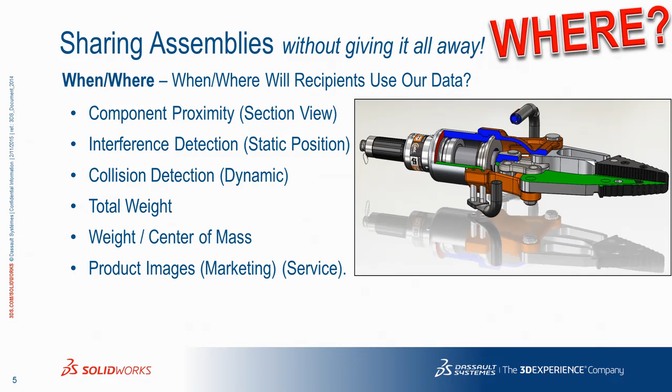Sharing assemblies again without giving away. Why wouldn't you want to share? Why not? Well, it's pretty obvious. We kind of covered this already, but it's a repeat because it's a big issue. Have you ever thought of sharing your product but chose not to because of fear of sharing too much? And this happens every day in every industry. So the why is really the big hurdle.

But why wouldn't you share? If we look at the positives, the benefits of sharing your data, assuming it is something that somebody else would use in their designs, there's market awareness - to be recognized by your potential customers, it'd be nice if you shared your stuff so they could see it and find it and be made aware of it.

Engineers can then test fit, form, and function with your component or subsystem. Minimize repeated effort - that's a big one for me. I hate doing things that have already been done before. You know somebody's already engineered and drawn up this little pedestal podium thing. Why do I want to redraw it just because I'm trying to do some layout work? No, I want to find something.

Speed confirms selection. Everybody here has got project deadlines. You want to get them done faster, so if you can get somebody's models, that would certainly help. We're trying to complete the design, and without it, you're left with incomplete engineering data. How heavy is it? Where's the center of mass? The basic things. And this is going to build relationships between you and your customers, which should obviously then drive sales.

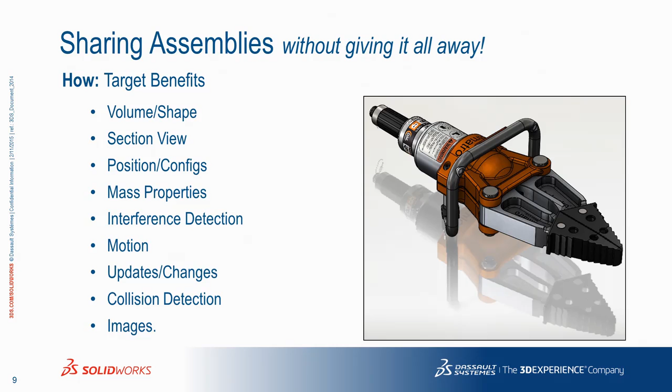So the big question is how. These 6 methods are the ones we're going to talk about: pack and go with eDrawings, neutral file format, saving assembly as a part, insert new part and join, SpeedPak, and Defeature. So let's get into it.

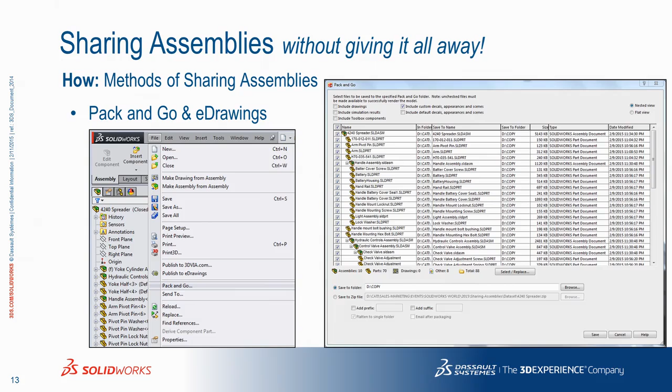Pack and go with eDrawings. Pretty much everybody's probably aware of this, that either through the icon or through the file menu, you can save your assembly with pack and go, and you get this really great big long list. You can save it to a folder, you can save it to a zip file. When you go to share that, there are some benefits.

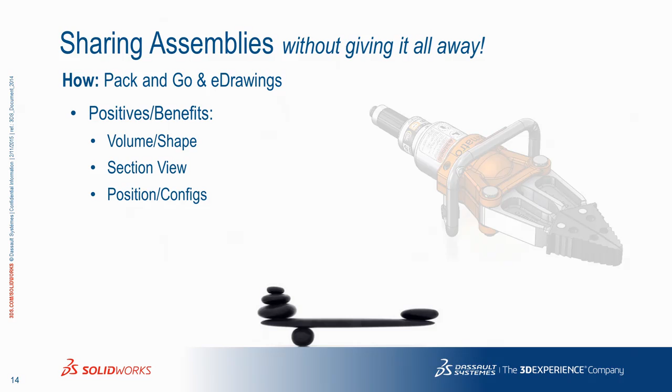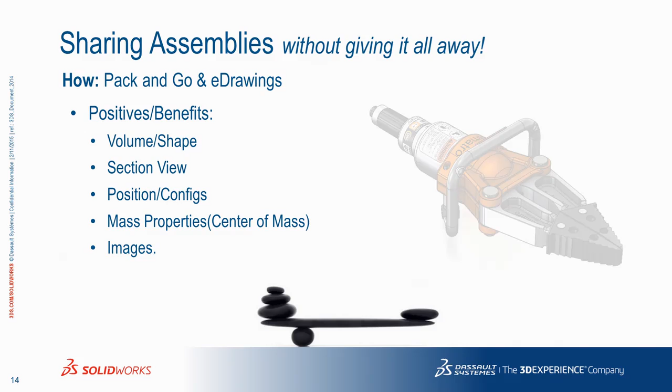You do have the volume and shape. You have the section view capability, position and configurations to a degree when you're dealing with eDrawings. Since this is pack and go, this is SOLIDWORKS native files - if somebody gets a hold of SOLIDWORKS, they can do a little bit more with that. Mass properties, center mass, that actually carries through to eDrawings - the center mass does, mass properties not so much from what I found, at least in eDrawings. Images - since you have the full data, you can make some pretty decent pictures out of it. On the negative side, mass properties didn't come across completely.

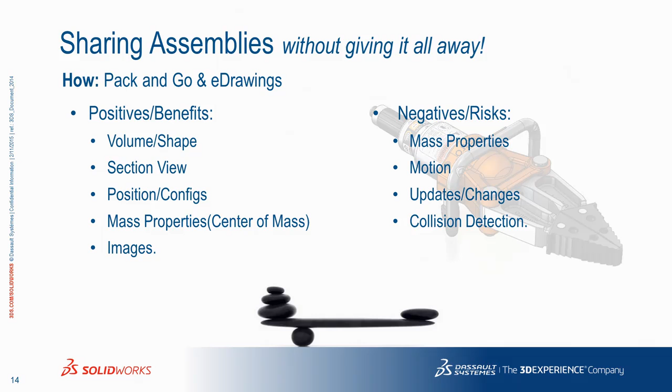Motion, not so much. If you've got an exploded view, you can animate that, but that's about it. Updates and changes: you've got the native data, so you can replace individual files fairly well, but you have to manage and replace those. I can't really decide which side to put that in, but collision detection with eDrawings, we're not going to be able to really do that.

But the big issue is that you're giving it away, which is why we almost shouldn't have this one in the slide. But everybody knows how to do pack and go because they're moving stuff back and forth amongst coworkers, mobile computers, and so on. So we're using pack and go a lot. You might spin your design into one variation or adaptation for one customer's location versus another. So a lot of times people will use pack and go, but this is kind of a big no-no if you're trying to share your information without giving it away.

So the real stuff comes next: neutral file formats. Probably everybody's worked with some of these file types, whether it be Parasolid, Step, or IGES. Those have been around since the beginning, I guess, along with ACIS SAT files. There are some options both on export and import of these files that you can play with, and there are some vintages of IGES and Step to be considered.

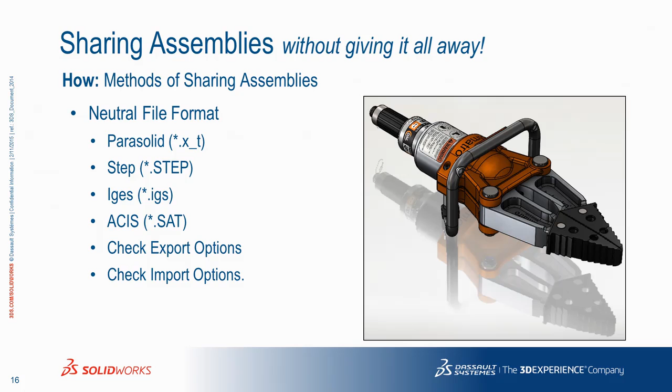So when you do a Save As, you can change the file type here. In the Save As dialog window, if you set the type, the Options button will come up where you can then deal with either export or import options. When importing, if you set the file type to all and select the file, I know it never used to give you that option - I think that might have changed though. But if you don't see the Options button, definitely set it to the Save As type. Then you'll get a list of options where you might consider changing some things depending on how well that might translate.

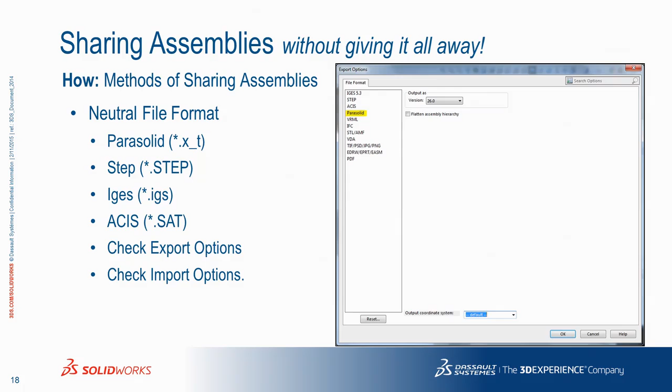Here are the results of using the export method with Parasolid. We have the original geometry on the right, and the resulting import back into SOLIDWORKS on the left. If we're concerned about the imagery - how good does it look, since we want to make marketing literature for our product from what we've downloaded off the web - that's not bad, but you see there are no decals, and some face colors seem a little off.

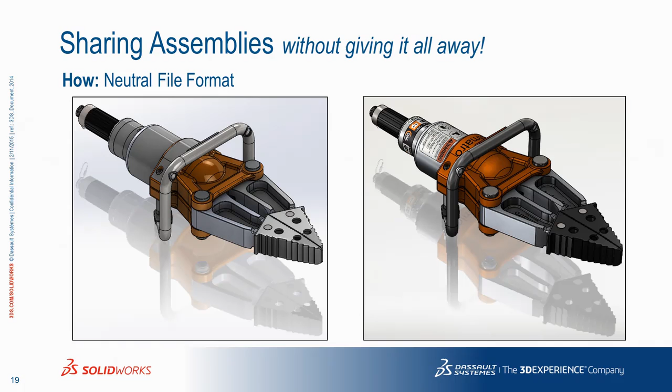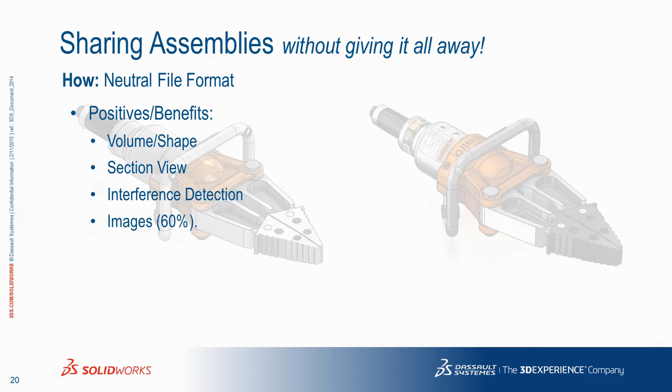So let's take a look at the trade-offs. On the positive side, we have volume and shape done very well. We can section view this real easy. Interference detection in a static state is going to work. Imagery, again, about 60% - I just threw a number at it, sounded good, better than 50%, because then I wouldn't know where to put it.

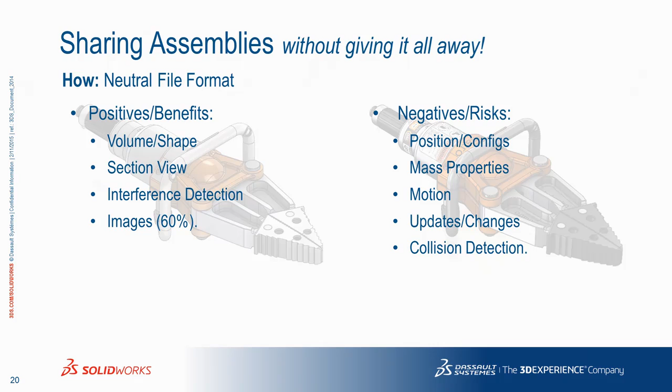On the negative side though, positions and configurations - you're only going to get one, otherwise you have to do a whole other model set type export. Mass properties did not come across. This all comes in as individual parts or bodies, and they don't have any material information coming across. There's no motion, no mates, and updates and changes involve a lot of different files or bodies to deal with when a change comes - sounds like a bit of messing around. No collision detection either, which kind of flips the pile of stones around, making this maybe more negative items than positive.

Another method: save an assembly as a part. How many people have tried this? Oh wow, everybody - that's awesome. Maybe for the one or two people who didn't raise their hand because they're tired of raising their hand for these kinds of things, I'll show the video anyway.

If I can select that - there we go. So from the File menu, we do a Save As. There are a few options when you change the file type from assembly to part. We can see that there's exterior faces, exterior components, and all components.

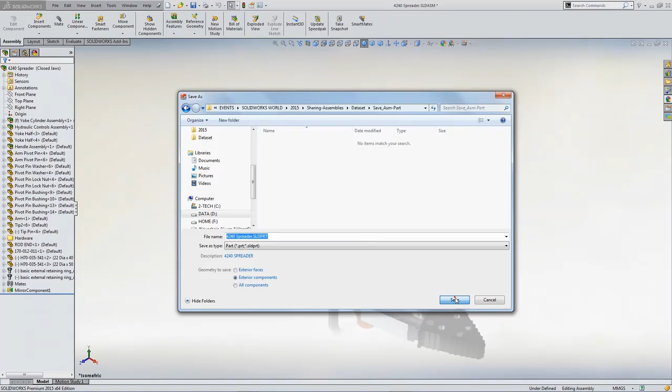If you've experimented with this, which it seems like most of you have—my first go around with this video—here is going to show exterior components being saved to see what that looks like. What you find out very quickly is what you consider to be exterior components and what SOLIDWORKS sees as external components are not the same.

So you usually end up with something a little less desirable in that regard. So I went back—let's see, where were we at in the video here? I closed it. Here I'm going to open up the part file now, that is that assembly, to take a look at it. Imagery initially comes in kind of messed up. Oh, and I shouldn't have hit that. Dang it, now I killed my video.

All right, since most of you saw it, I'll just explain the rest of it. Imagery came in a little messed up at first, but a control Q, good kick in the pants, straightened it out. But there was way too many items in there that I didn't want to share because of external components.

It's more like if you took your product and submerged it in water, what would it touch? What would the water touch? Every one of those parts that gets wet is what gets selected for exterior. So if you've got a small pin in a large hole, when the water can get around it, it's going to grab everything inside, which kind of stinks.

So the other method that I used in the video was to take the assembly, create a configuration where I'm selecting components to be suppressed that I don't want to be exported. So I'm manually getting involved, spending some time with it, but I'm building a configuration so that I can export all parts that are not suppressed into the part file to make a better solution.

The results here, graphically, looked a lot cleaner. I'm pretty happy with the imagery there. If we look at the trade-offs here, benefits-wise, we got the volume and shape again, section view capability, even though it's a multi-body part. Interference detection, again, static state stuff. Image stuff looked like it was closer to 90%, just maybe the decal stuff.

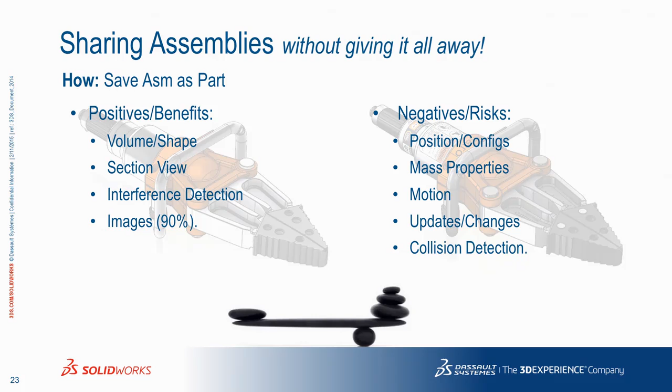Updates and changes, you got to go back through this. If you make the configuration like I did, which worked better, at least I don't have to do so much effort—it's just a save as, but there's some other options with maybe some better tools. So collision detection, again, not so much. So a little bit more on the negative side maybe than positive.

Insert new part join. How many people have tried this? Excellent, so something new for you. So it was worth coming here maybe. That was the point, right?

So insert new part. Oh, let's back up. Let's show the video because I think I like this mouse better here. Oh, now it doesn't want to work. There we go. All right, so how do we do this?

You take your assembly and you insert a new part. This is more like in top-down design type thing. When you do insert new part, you have to select a face and tell it how you want to locate that part, and then it goes into sketch mode. You exit sketch mode, and then you go to insert features, join.

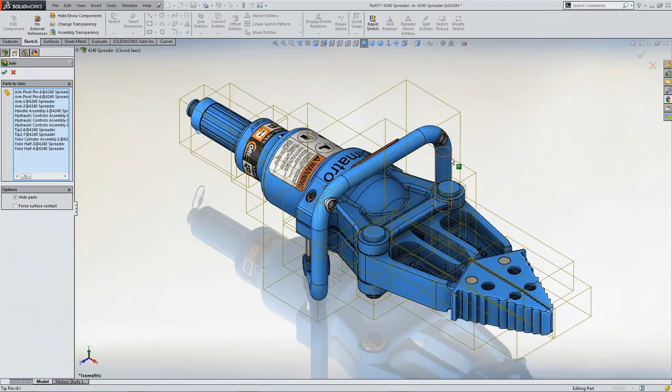And you select the parts that you're willing to share, which is what I'm doing here. And it's adding them to the list. It's going to insert those parts into my new part. So I'm going to have a duplication in the assembly here. Okay? So I'm just picking everything I'm kind of concerned with.

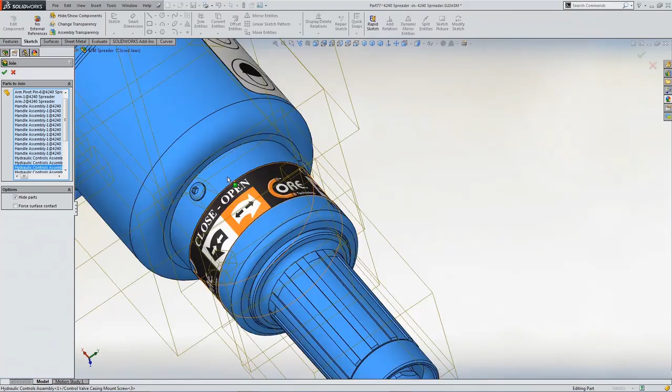So the screw heads, because if somebody's making a cabinet or a drawer or a case to carry this thing, those might be kind of concerning, but I left the washers off because I didn't care about those, and I'm not picking anything from the inside because we really wouldn't care or want to share any of that. Okay, so I'm selecting all these parts to be joined, anything that looks cool and helpful to make good imagery as well.

And when we pick OK, oh, it will also hide parts if you don't turn off that option. That's kind of hard to see there. But exit part mode, okay, now you can see there's some stuff on top of stuff going on there.

So I'm renaming this part. Initially, it's a virtual part, exists only in the assembly. I'll then go out and save it as its own file.

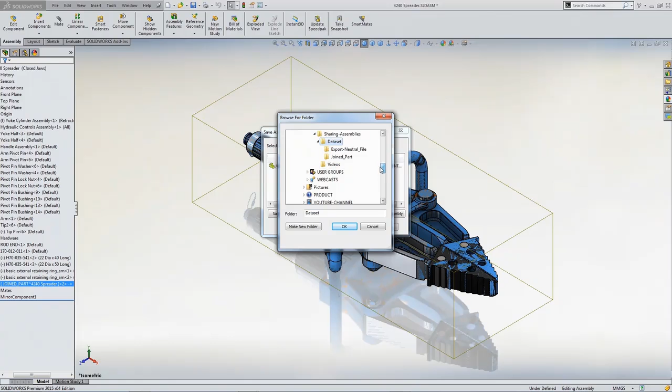Save part, and we'll put it in a different location. So right now you're seeing a part that is a duplication of most of the parts in the assembly, but it's a single part file. It's creating the in-context relationship. There's the external reference marker in the tree behind the part file.

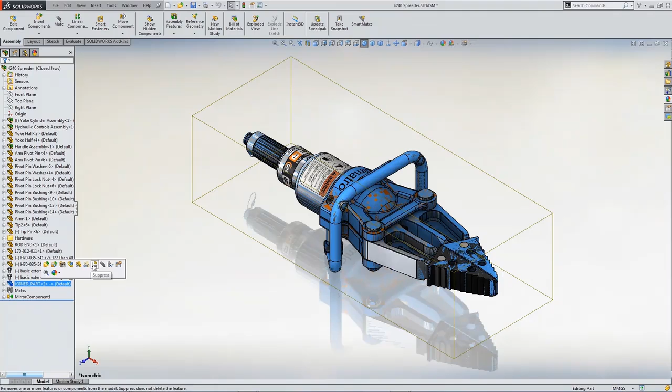And we'll go ahead and open that part up in its own window so you can take a look at it. Here's the feature tree. It just says join, and everything is gray. Part imagery stuff, settings. Back here in the assembly, then you would want to go ahead and suppress that, get it out of your assembly, because otherwise you would have incorrect data in your assembly.

Here I'm going to go and make a change to the design. I'm going to go just punch a hole in this part so we can see a change and demonstrate the associativity from not only the part to the assembly like you're used to, but how we can carry that down to the shared part. Okay, so I'll punch a big hole in there. We'll go back to our assembly file.

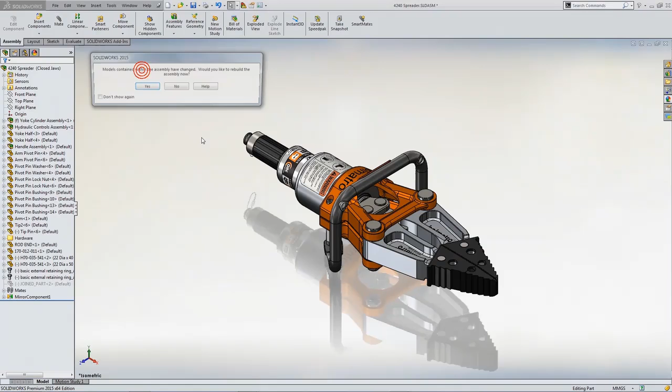You can see the change there. This item is suppressed right now. I'm going to unsuppress it. That will push the change down into the shared part. And if we open that up in its own window, you can see the big hole. So changes zip right through, okay? At least geometric changes.

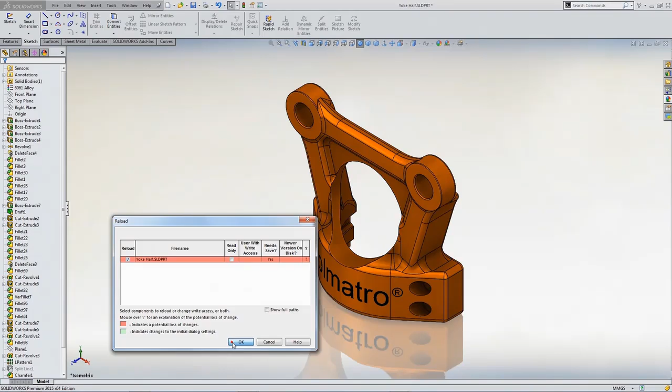So you have that linked reference that you can use to update. And since we're suppressing it, we're stopping any of that calculations that you wouldn't need most of the time. I think I'm just putting this back to where it was, so we can stop that. So the resulting file then looked like this. Again, it lost all the color stuff, but it made it all nice, boring gray, I guess. That wasn't too bad. It's better than multicolored stuff, maybe.

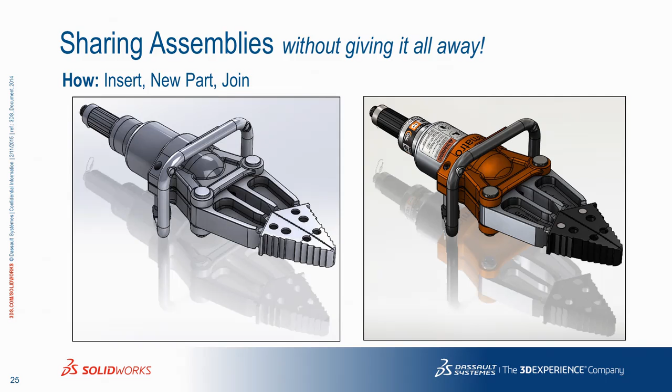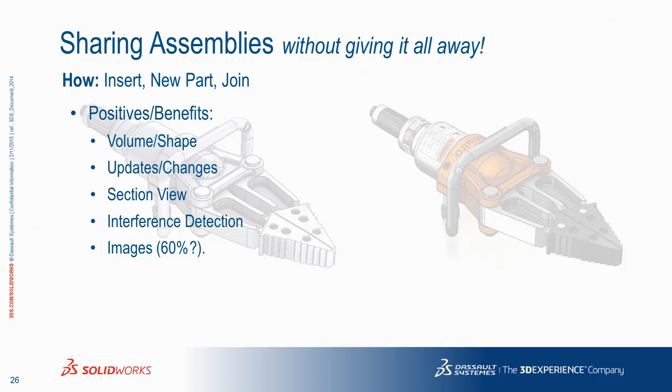If we look at the trade-offs, on the benefit side, we got volume and shape like before. Updates and changes, that seems to be a better plus here. We could even show some of that. Section views, certainly going to work. Interference detection for static again. Image, I'd say it's better than half, but that's kind of questionable. I guess you can decide on all of this anyway.

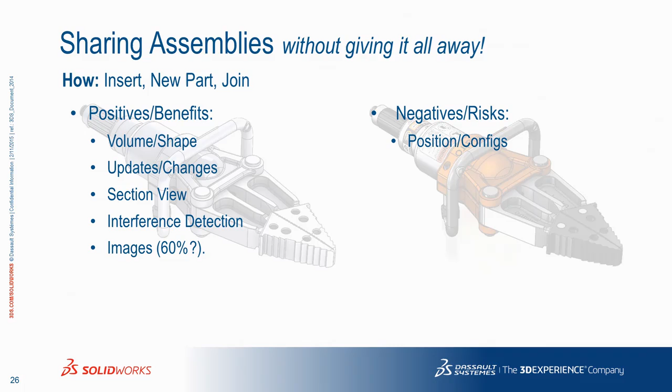Positions and configurations, I'm only going to get the one. But since it is a feature, we could probably do some stuff with configurations to make different variations. Would we get separate configurations in the joined part? I don't know for sure. I'm kind of thinking on the fly here, thinking I should have maybe spent a little more time with this. There's always more to learn, right?

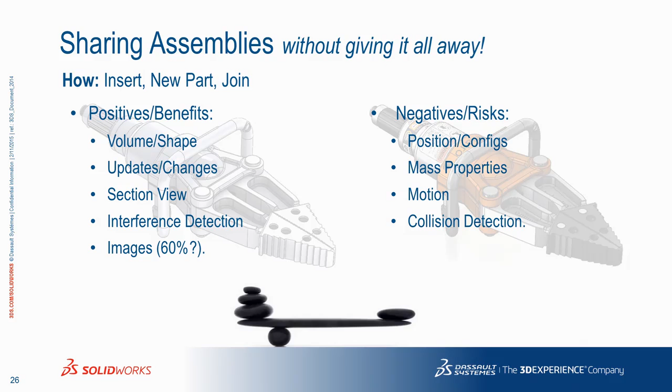Mass properties did not come through. Motion didn't. Collision detection wouldn't work then. So it's a little bit more positive maybe than negative. It's definitely interesting. Speed pack. Oops, giving it away. This one looked horrible.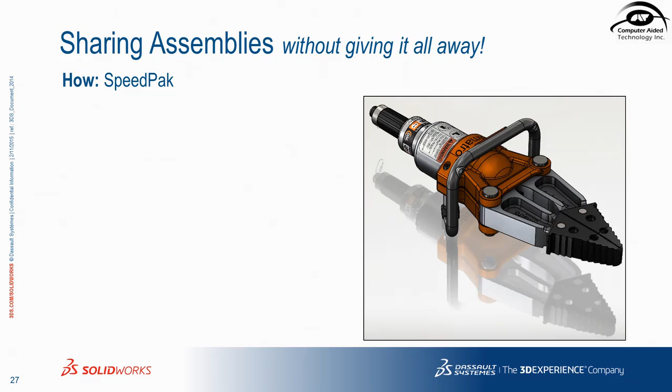All right, so where's the mouse here? Sometimes this works and sometimes it doesn't.

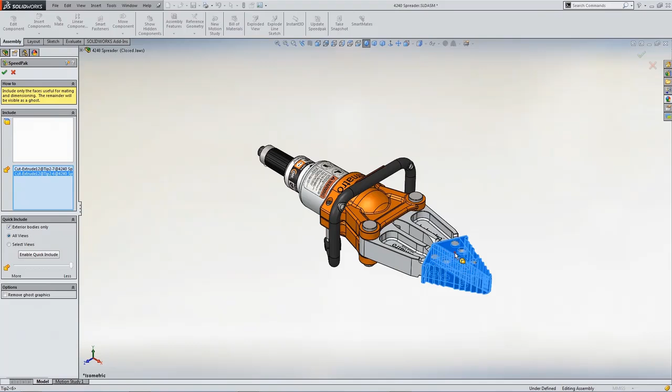All right, so SpeedPak. I don't know how many people have tried SpeedPak. Okay. You go to your configuration manager, you right-click on a configuration and say Add SpeedPak. There is a long list of items here that you can include, whether it be faces or bodies. I usually use the bodies, parts type selection. You can do the quick selection stuff here.

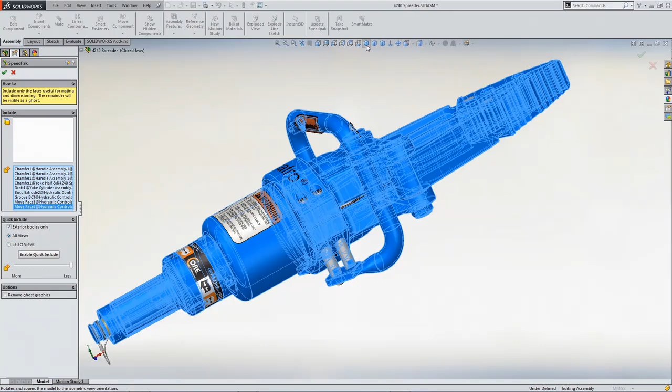Never been real happy with the results of this, but these are the items you're choosing to include body information for in this case. The other items that you do not select will be visually there at most, but they won't be able to touch and measure any of that. So it's kind of an interesting trade-off that you can see everything but share just a few things as far as being able to touch and measure. You see the configuration or the SpeedPak configuration here.

Oh, those videos stink. All right. Can't pause the videos real well running full screen for some reason.

So the SpeedPak configuration looked a little different. The imagery that came across when I loaded it back up by itself, it looked goofy like this. Not really sure why. I think it's kind of a regression with 2015 SP 1.1 at least.

The interesting thing about SpeedPack, why I was initially thrilled about it, is it's a derived configuration of whatever config you choose to make the SpeedPack from. So anything you do with your normal configuration, maybe it's just default, is automatically going to show up in that other configuration. It's not a separate file to manage. It's easy to find and get at.

If you take your existing assembly file as is and send it to me, but you don't give me any of the reference parts, most of the time you send somebody an assembly, they open it up and it says, cannot find. Nope, you get nothing. If there's a SpeedPack configuration in there and it's saved in the SpeedPack configuration, when you open it up without any of the references, you can still see and work with that. You can stick it in another assembly and you can mate to it.

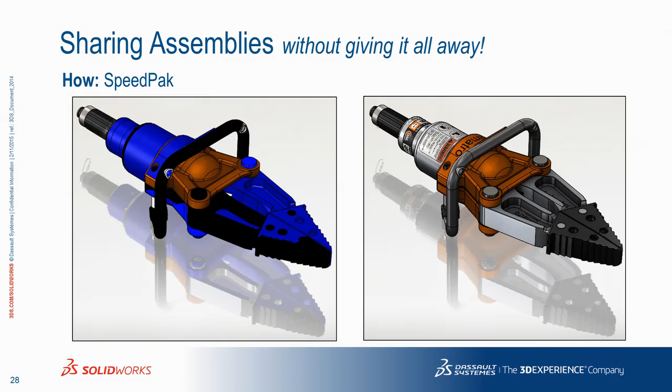You want to use SpeedPak configurations and routing? It becomes a mess. Well, if you're working with routing, you already know it's kind of a tricky product. Have at it. Maybe you make a presentation for next year and tell us how well it went. That would not be my choice for a presentation to do next year. Routing, I was involved with a hands-on a while back, and it was very challenging.

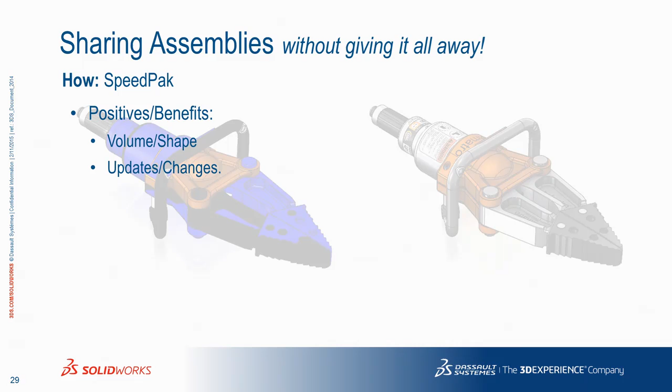So we'll take a look at the trade-offs here. Benefits again, volume and shape. You have the look of it. You don't really have the volume, so to speak. Update changes because it's a derived configuration. It's easy to get at, but you notice that's the end of the positives list. On the negatives, positions and configurations, mass properties, motion, section view, cannot section view SpeedPak. Big trade-off. Interference detection doesn't work, collision detection doesn't work. Images came across horrible. Had to put a sad face in there.

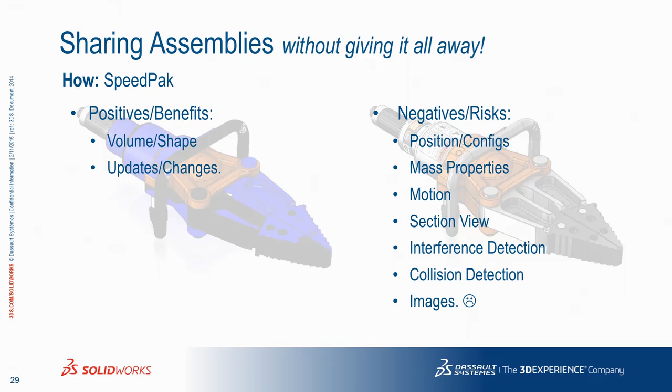So personally, I don't know if it's just my short experience with 2015 in this particular data set in the short amount of time that I had to work with this, I really feel that SpeedPak seems to have become less than what it used to be. So it seems really interesting. I wish I would have had time to take a look at the knowledge base to see what kind of existing issues are known about this, and maybe some of these are regressions that are being addressed, but couldn't get there just yet. So a whole lot more on the right side here than the left side.

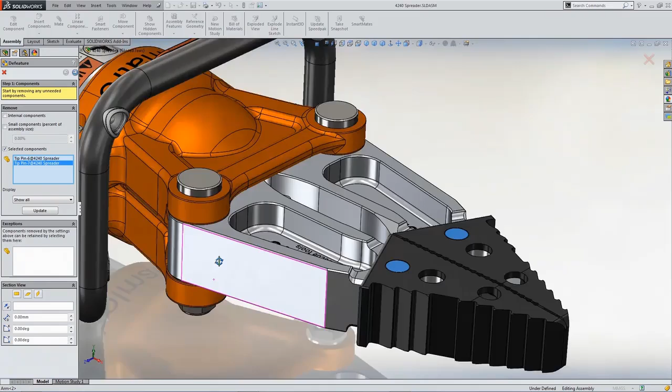Defeature. This is the bigger one. Longer video. I'll try not to mess it up. So Defeature is a feature you find under the Tools menu. It's got a very long property manager. You can select internal components, small components by percentage. Here I'm doing selected components. You pick the parts that you don't want to include. So the selection process here is a little bit more mousing around, if you will, to select things like washers. I'm leaving the nuts behind and the screw heads because, again, overall size dimensions might be helpful in a number of cases with components that we're trying to share.

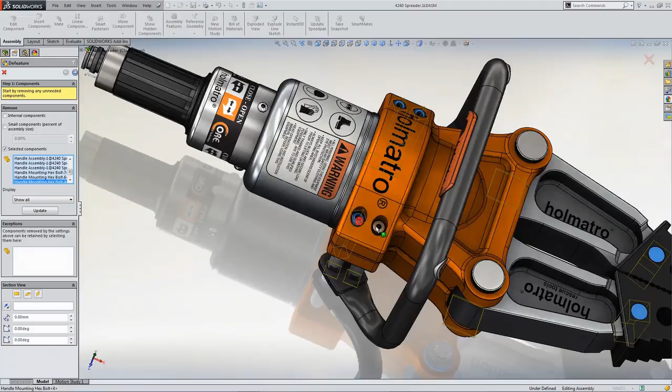So there's a number of steps or pages to this property manager. Right now I'm just going around selecting a lot of parts, but at the top there's a blue arrow for multiple pages of information that we're going to go through. You can choose some exceptions. So depending on your selection technique, there's a lot of different ways to select the items that you want to not include because the internal stuff you don't want to show. And I just kind of brute force my way through this trying to pick them graphically.

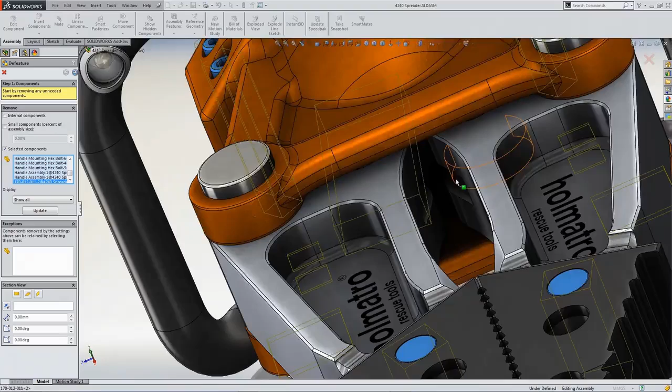So I must have been feeling tired at the time I was doing this video. All right. And I don't want to touch the keyboard or the mouse because it'll stop playing and I can't have it pick up where we left off. So I'll give it a second here to pick up a couple other parts probably.

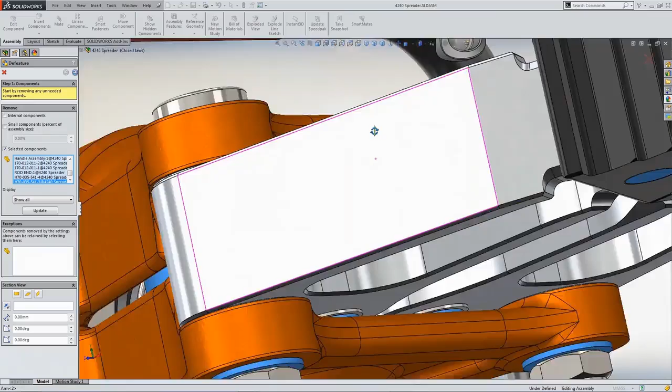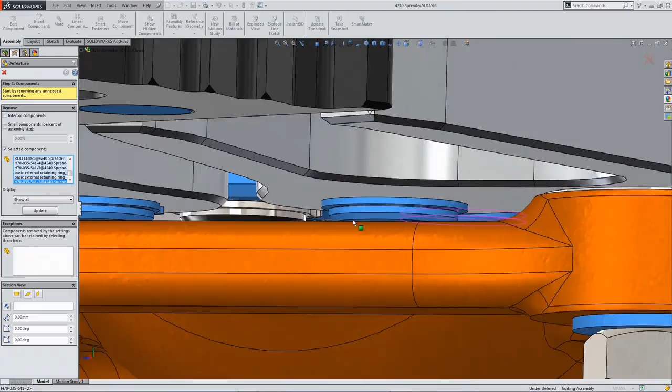And then the ambient occlusion keeps flashing in and out. You guys have used that, you know all about that. I probably should have shut that off for the selection process. Would have made things a little easier for me. Is Defeature only available in assemblies or parts? Both.

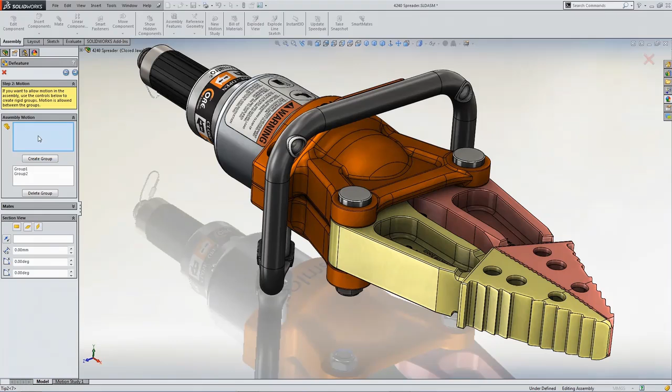All right, so next step here, motion. You can create groups to capture motion from an assembly. You select the components. The ones that I'm selecting here, I'm making a group. What I've seen in the past with this, I didn't test it on this one, on the update, capturing that motion is really tricky, but it can be done. Okay. What I did here did not capture the motion properly entirely. Then there's features to keep.

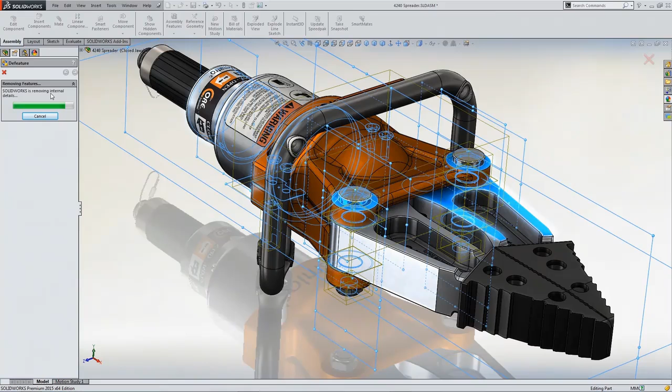Being selected, you can choose additional things you might want to add. You hit the next button and it goes through this removing features information. It's doing some calculating here. We should see it split the screen here shortly. And we should see the before and after effects of Defeature. And now it's looking at items to remove, maybe some additional items you want to get rid of.

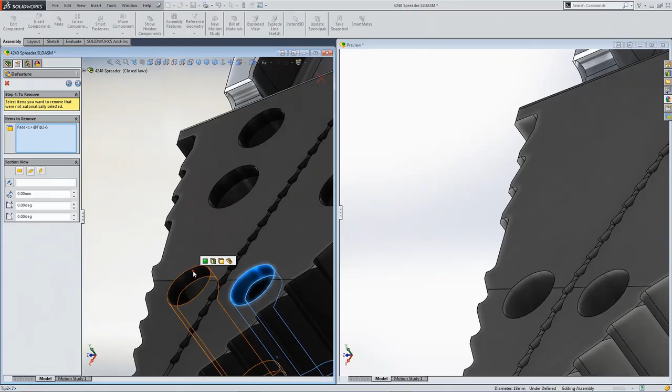So maybe there's a little too much detail on the right here with these extra holes. Don't really need that. Shaded triangles and all for video cards. I want to simplify that. I'm selecting faces that are going to be removed. You can go and select an individual feature, like these holes. These happen to be patterned. And I think if I remember right, I grab the feature and it grabs 3 of the 4 because I didn't grab the seed kind of thing. So I have to grab the other one. And then some oddball stuff on the end, maybe the little cable thing there. We don't need a little retainer clip.

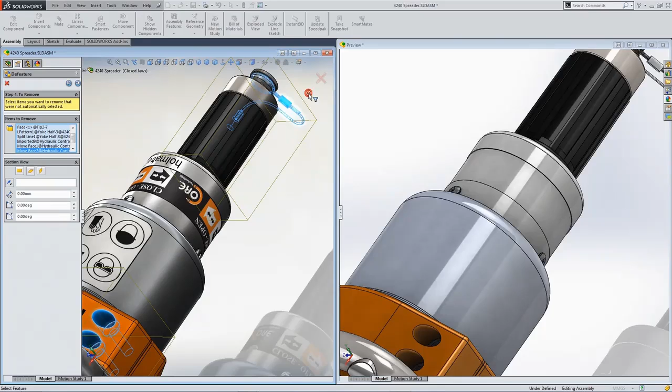I think I went deep down in here. We can even remove the screw head stuff. You probably don't really care about seeing that. And again, with shaded triangles, every little bit you do can take stuff out. So then you update it again. You can see how it kind of simplifies this stuff. And you can go back and forth and tweak this a bunch.

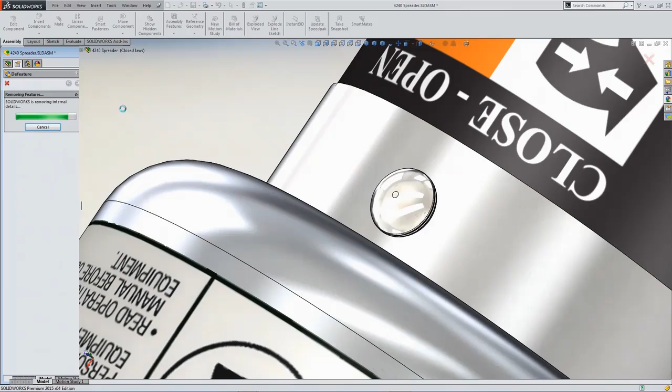What's nice is this is going to end up saving this as a feature in the tree, so you can edit this if you get tired and you get frustrated with the success you're getting and you want to come back to it later. It's really nice that it saves that for us. So here we can see the results. It's got that screw head removed.

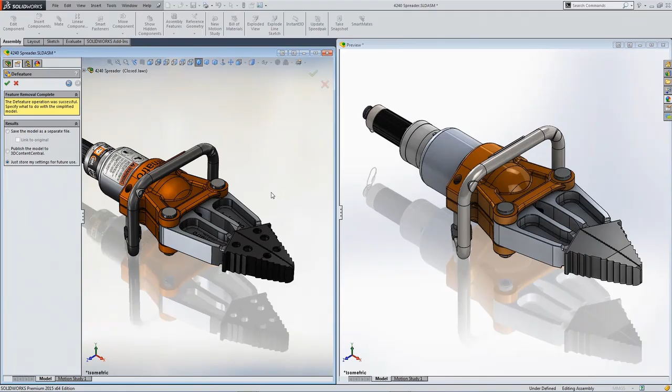Now you can just save the settings for future use, or you can also save the model as a separate file, and you can choose whether you want that to be linked or not. So you have those options. Oh, I can see I got that one extra hole in there that I didn't want. So back it up, select the face, save the feature, step it forward, let it reprocess.

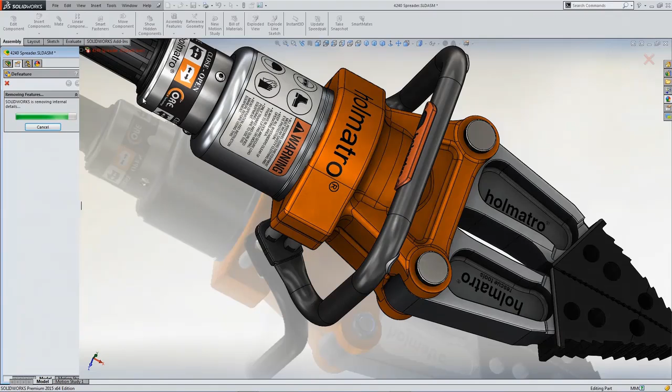I need to work on my video editing stuff here so I can fast forward through this. Speed it up for you. This should be the last edit though.

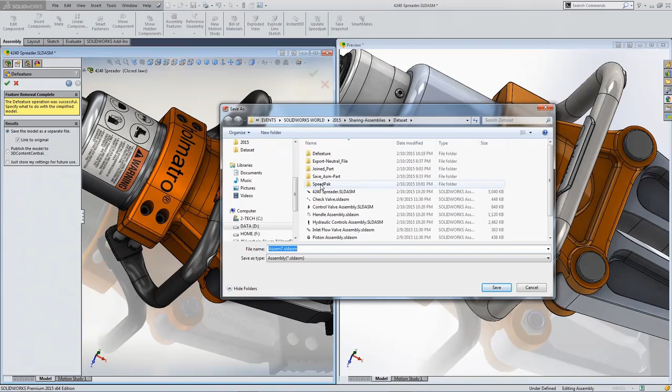All right, so there's the save options, whether you want to save it out as a separate model, link to the original, or just store the settings. Either way, it'll store the settings when you hit the green check mark. Don't hit the red X. So I'm saving this assembly out as a defeatured part. Okay, so it's going to take my assembly and save it as a part for me, but it's got all this detail removed, simplifying the geometry.

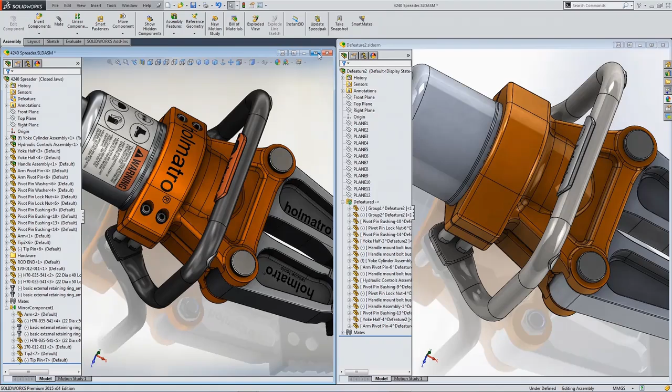And if we open that up, oh, there's the feature in the feature tree. Nowhere near the origins, way up at the top. Out of sight, almost out of mind there. But you can come back to that and create a new export file, edit the settings as well. So I saved my assembly with that in there for future use.

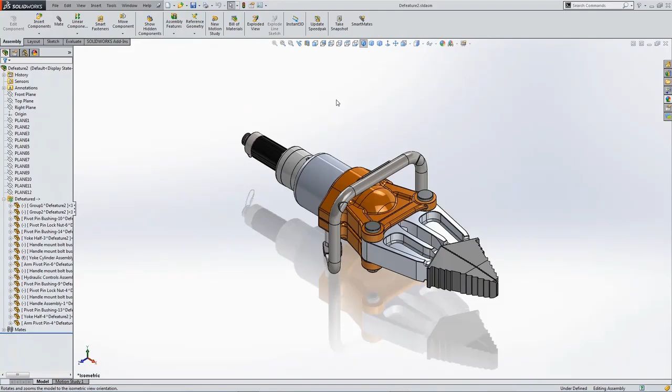Here is the defeatured part, much more simplified geometry. And you see a defeatured feature here with the external reference because I linked it. These are all bodies in this part file. So the result image on the right looks pretty decent. So I was pretty happy with that.

Trade-offs again: on the positive side, we got volume, shape. We can do section views with it. We got mass properties with a star. Why did I put the star in there? We didn't get true mass properties, a one-to-one match. But when I did this previously, which I want to say was 2012, the mass properties matched exactly. Center of mass, total weight, all that sort of stuff. But when I did this one, it did not match when I checked it, and I feel that's a regression.

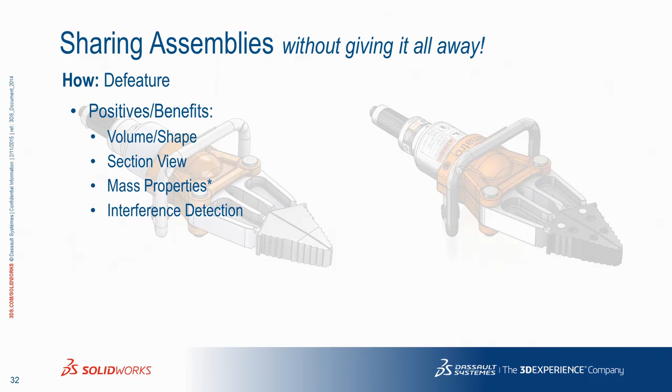So I put it over here because I'm pretty sure it's supposed to be there. It's supposed to work. But if it doesn't, you got to do at least something to say it might not be right. Interference detection we could do. Motion, because it can capture motion. I don't show it in the video because I wasn't successful with it. In the 2012 version that I did, the export, I was able to capture that, but it did take a fair amount of trying. You got to want it. Until you kind of understand how the mates are captured and the grouping is done.

But updates and changes are pretty easy because you're working with your regular assembly. It's got the Defeature item in the tree, and if you make some changes, you can go to that, step through it again, and export a new file. And if you're not making any other changes other than, oh, this part I added I don't want to include, you could select it to be removed or choose to include it. That's all you really have to do. So it's very easy for the updates.

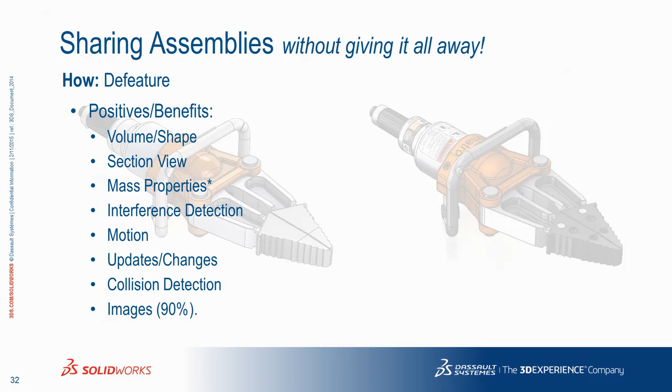Collision detection then, because we have motion, we could get a hold of that. Image stuff was pretty good. Call it 90%, just missing maybe the decal stuff. On the negative side, positions, configurations, it's just a one configuration file.

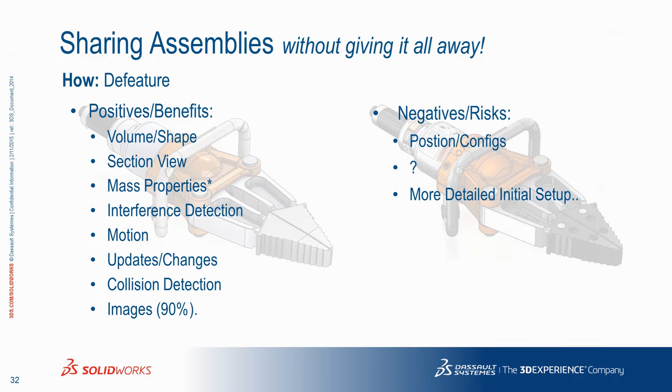So what else are we missing? It's a bit more of a detailed setup. That's probably its only negative, I think. It takes a bit more to get through it, especially if there's motion you want to capture, but the results are pretty decent. So a lot more on the positive side.

Well, it shouldn't be as big as the entire assembly and reference components because you're only choosing the items you want. But because you're inserting the part, we pretty much got everything, unless you've used part configurations where you maybe have a simplified part versus a full detail. If you're not doing that, it's going to be a one-to-one for everything you include. So I guess it's kind of based on that.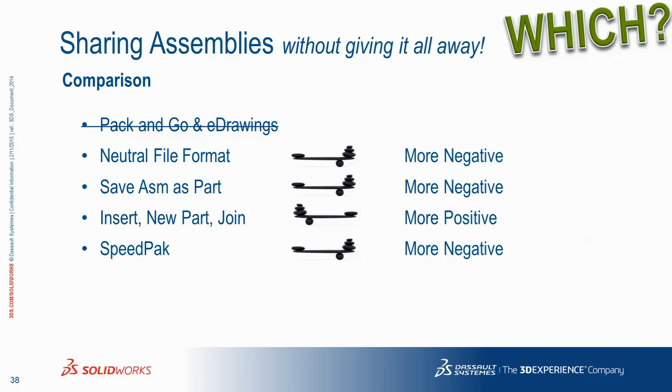SpeedPak. I probably should have turned this with the stones way down here because it was more negative than anything else, at least with my results recently. So not to say you can't try this yourself and prove me wrong. I'd be happy to be shown something that I didn't experience and how I did it wrong maybe.

But Defeature, definitely more positive than negative and most positive of all the options. So if I was to make a recommendation on where to start trying to share assemblies without giving it all away, I would start with Defeature.

I have a quick question. I do Defeature. If you notice, when you do that, the bodies' file names retain some of the original part numbers. Okay. And we've had issues where this gets sent out, and the customer can see our part numbers. Oh. They all try to order parts that we don't want them to order, and it causes customer confusion. So I'll take the Defeature and rename it, save it as a part file, and dummy it way down. Uh-huh. Okay.

I don't know. You're right, I didn't notice. I mean, I noticed that there were file names in there. I didn't consider it because the files they gave us were named by description, which is a bad habit that the training material also starts you out with in Essentials. But good point. We don't want the individual file names, especially the part numbers, showing up in the Defeature. So that is a bit of a drawback. But you notice with my little trade-offs there, I only had like 9 items, and that wasn't one of them. So no worries for me. But in the real world, yes.

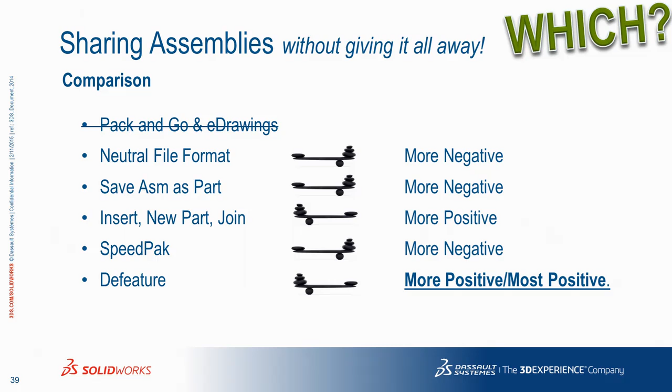Yes. I should have had that as a caveat on the slide for SpeedPak, that it doesn't work with anything but SOLIDWORKS, that current version or forward. So if you're trying to go into other systems, pick a modeling system, that's not going to work at all. Good point. Thanks for bringing it up. So if you're trying to go to other systems, even more negative on that one. I'm really starting to feel like a hater, but it feels justified.

So that's really the end of the presentation.